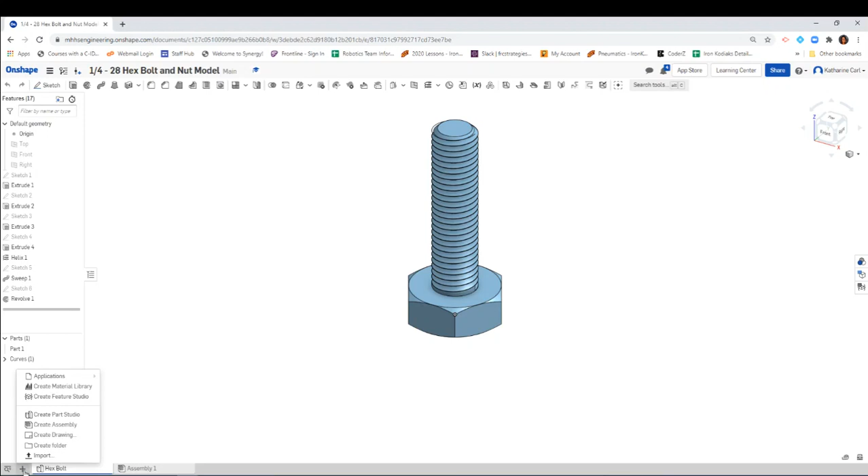If you notice, it renames a new and creates a new tab. I'm also going to right click and rename this tab the hex nut. That way we can really quickly tell which tab is for which part. I'm going to click in the open space to confirm.

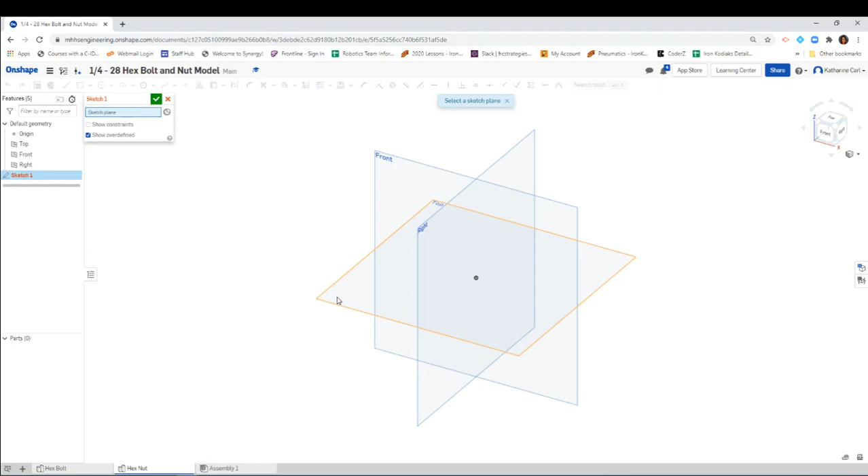All right, so we're going to model this very similar to how we did the hex bolt. I'm first going to create a sketch on this top plane. Again, a lot of dimensions are going to be similar. Why? Because they have to function together, right?

Similar to the other one, we're going to start with a polygon, and more specifically, we are going to create a hexagon with 6 sides. Click to make that stay since it's 6. If this is a different number, don't worry, just right click, hit escape, and then you can double click on that value and enter in the correct number of sides, okay? But so far we are good, so I'm going to hit enter.

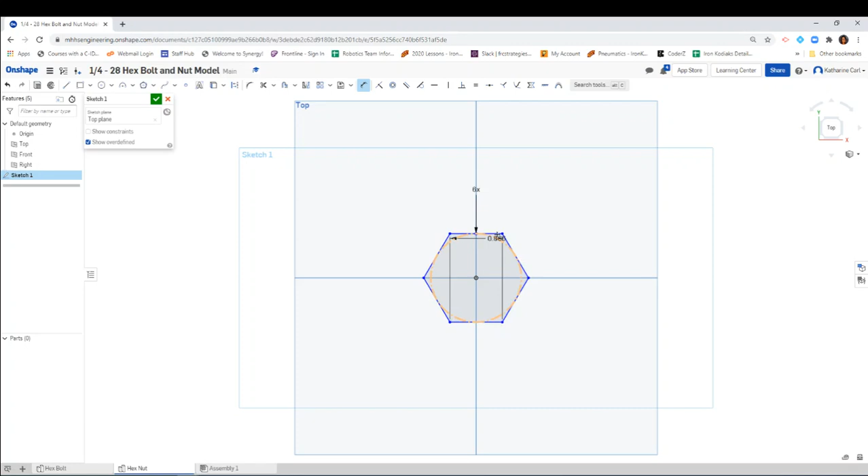The next step is we're going to measure and dimension across the flat. So click on one side, the next side of the hexagon, click to make it stay, and we want that to be 1/2 of an inch to match the hex bolt head, okay? Hit escape. I'm going to bring this a little bit closer so that we can kind of zoom in a little bit more.

All right, our next step though is we're actually going to draw a circle in the center, and that's going to represent kind of the hole in the middle of the nut, right? So I'm going to click on this circle, click on the origin, move it out, click to make it stay.

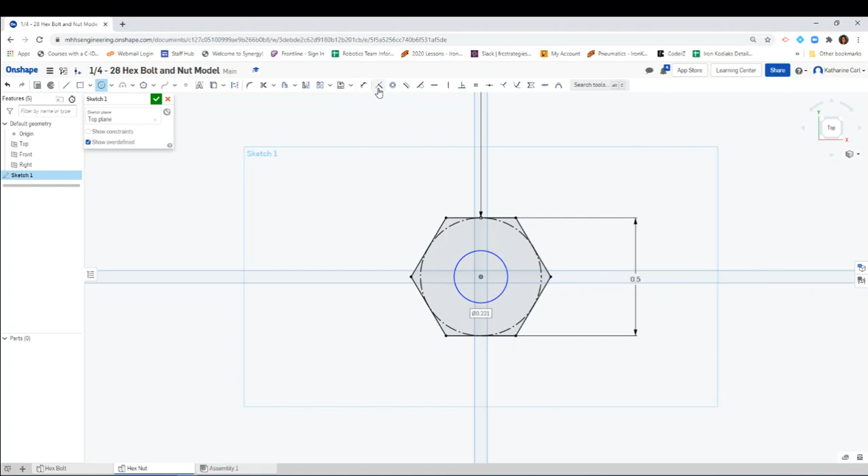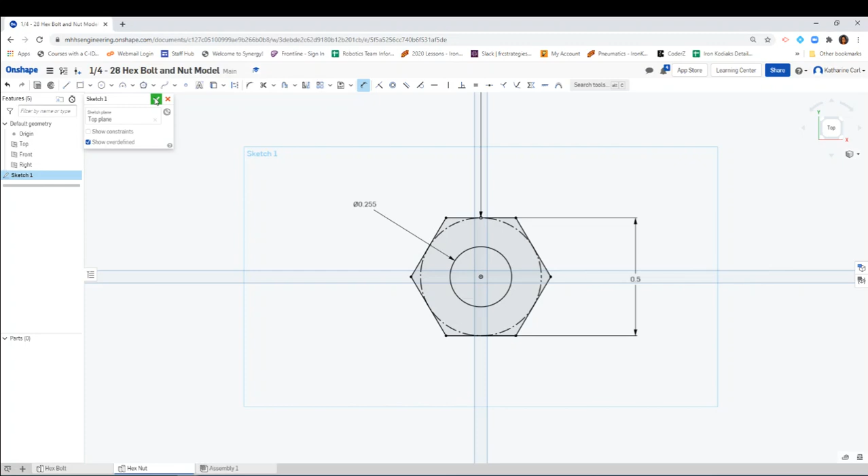I'm going to click on my dimension tool, click on that circle, and we are going to make it 1/4 of an inch, right, which is 0.25, but I'm going to add a really small value to make it a little bit bigger, and that's just due to tolerances with the 3D printer that I typically use. So I'm going to go ahead and click on enter, and there is our sketch that we need to start with. So click on the green check mark to confirm.

I'm going to switch to the isometric view and zoom in so that I can kind of check as I'm going to extrude it. So click on extrude.

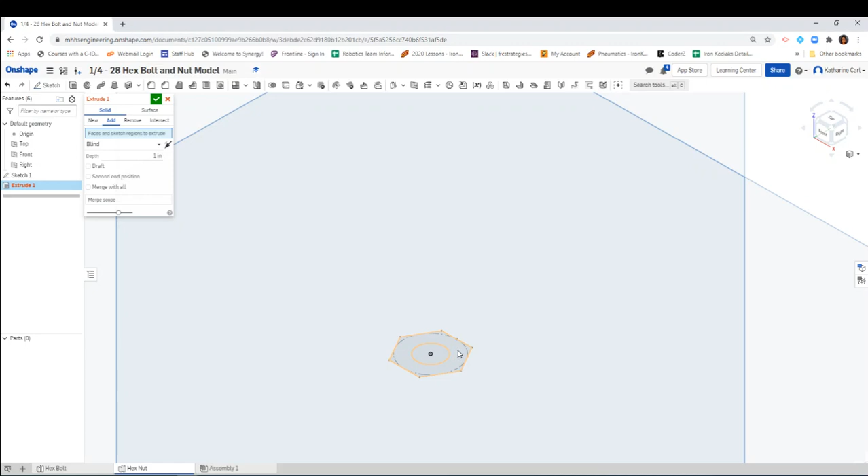We are adding a face, and the face that we're going to add is this outside ring. We're not going to add the inside, only the outside, right? Because we want the hole in the middle. So click it here, but we don't want 1 inch. Instead, we want the same dimension as the bolt head, which is 3/16ths. We'll click in the open space to confirm it.

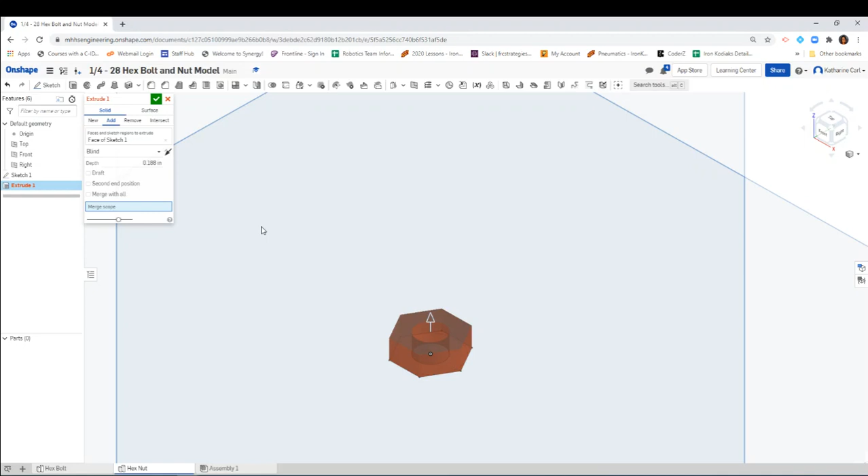When I click on add, it was having some challenges because I think there's a few things going on. So just make sure it's on new right now. And since it still is giving the correct preview of what we want to do, then you can go ahead and click on the green check and confirm it.

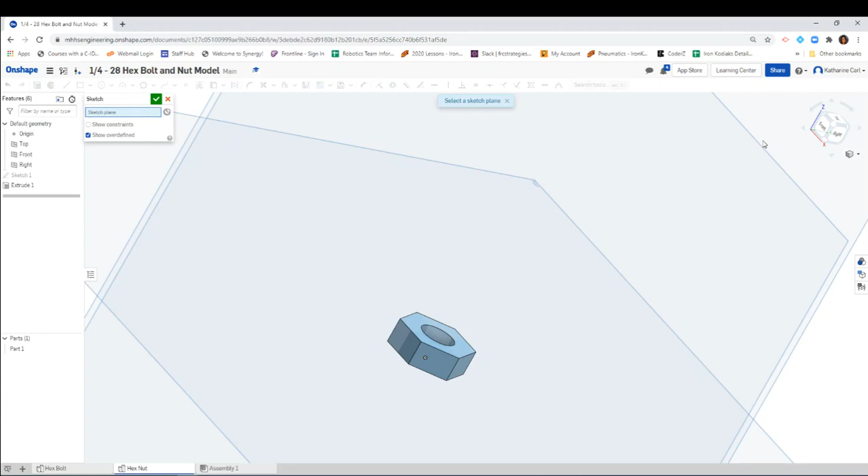There we go. Okay, so our next step is we want to add the professional kind of touch, which means we want to shave off these little corners. To do that, I'm going to create a sketch, we're going to do it on the bottom first. So this flat surface, I'm going to click on the bottom, zoom in so I can check it out a little bit better.

And remember, similar to how we did the hex head, we're going to add 2 circles. Our first circle starts at the origin. Oh, I don't think I did start at the origin because I think I moved.

Hit escape to exit out. I'm going to click on the circle tool again, make sure I'm at the origin, then click and go towards the flat edge to get that tangent symbol, making it an inscribed circle. Click to make it stay.

If you notice, that dimension right there should be 0.5, and it goes all the way across.

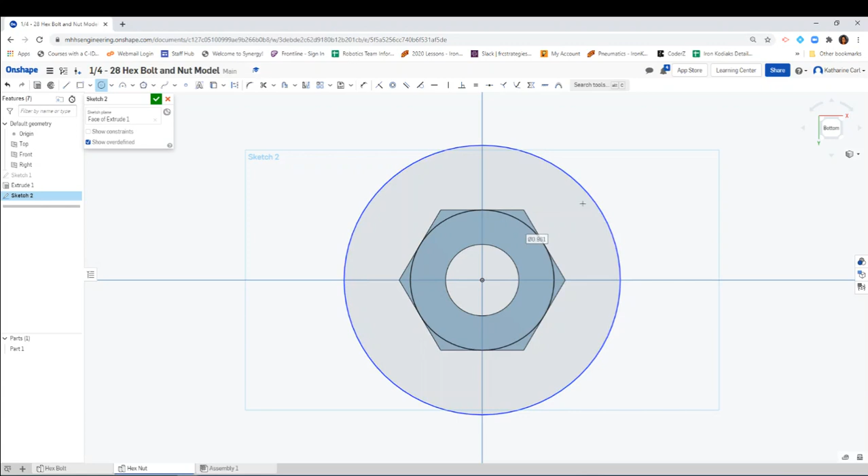Then I'm going to create another circle that's larger, and that was going to be 1 inch, just like it was on the hex bolt. I'm going to click on the green check to confirm.

I'm going to rotate it so we can see it clearly. Now we're going to use extrude, and we are going to remove this face and then these corners. I know it's going to look funny for a second, just like it did the hex head, because we have to add this draft in.

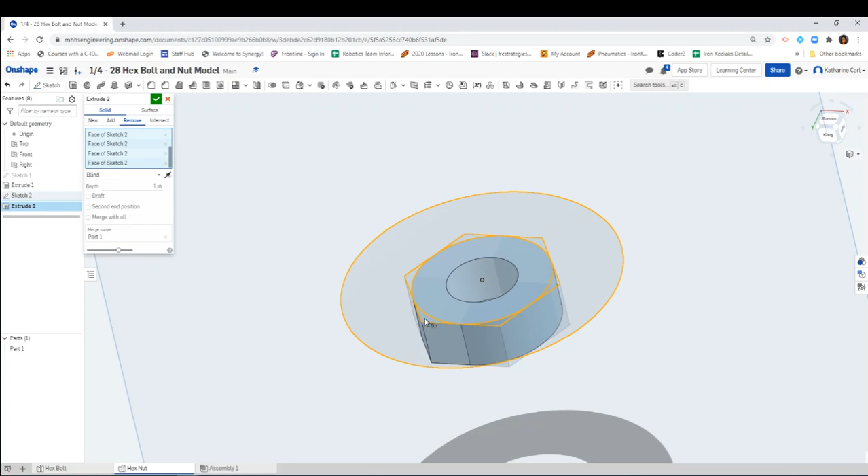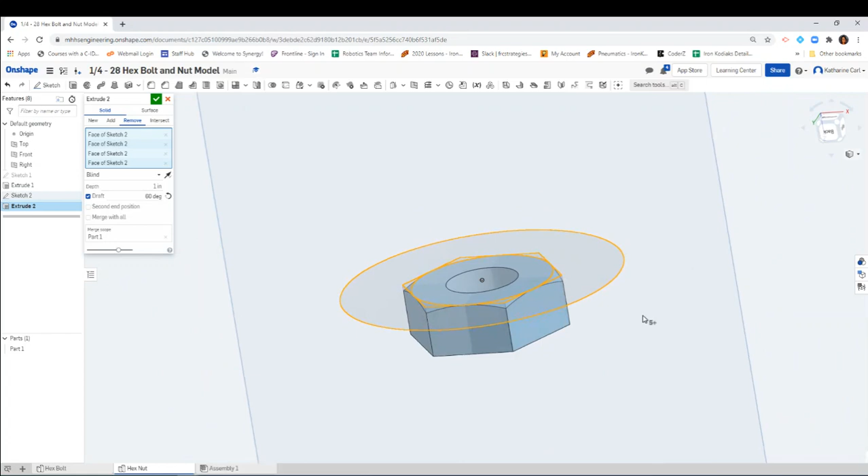So click on that draft. Remember, it goes inward, so you want to switch the direction. Click on that, and instead of 3 degrees, make sure it is at 60. After you type that in, you can click once in this open space to get the right preview so you can confirm you selected all the sides and it looks good. Green check, there we go.

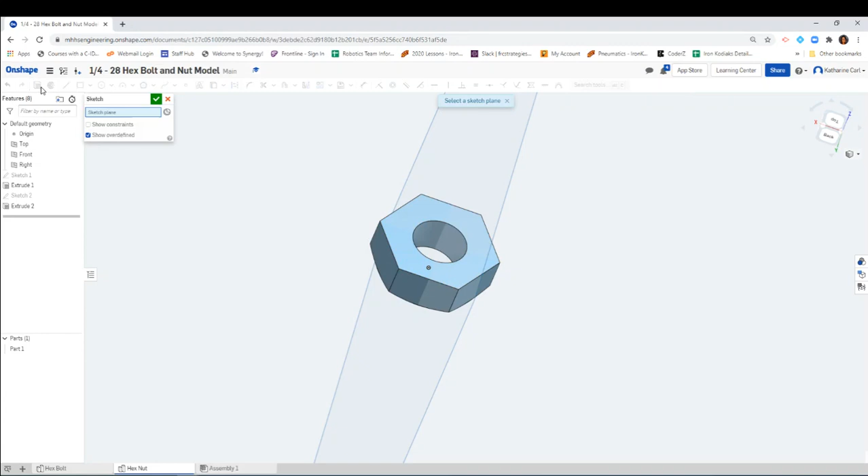Now we're going to do it on the other side. I just clicked on that view cube to rotate it and zoom in to see. This side has those corners cut, but this side and face does not, so I'm going to create a 2D sketch on this face.

I'm going to look at that top view straight on. Now we're going to add those two circles again. Click on the circle tool, click on the center, click on the edge to make sure that it is... and that's not lining up for a second, so I'm going to try this again one more time with the circle tool. There we go.

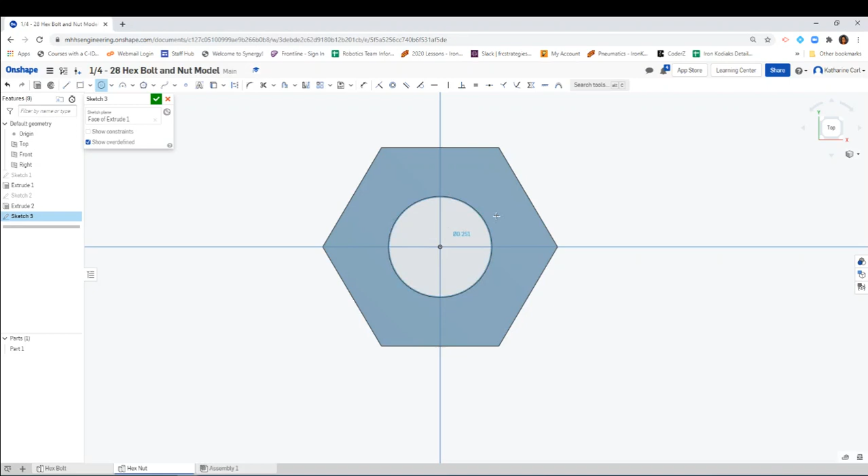Make sure it's in the center there, and now we'll see if we can go to the end. It looked like you just have to be careful of the symbols that you see, because every once in a while it won't line up, and you want to make sure that it does, sometimes not all the time. Click on the center again, because now we need to make our circle that's larger.

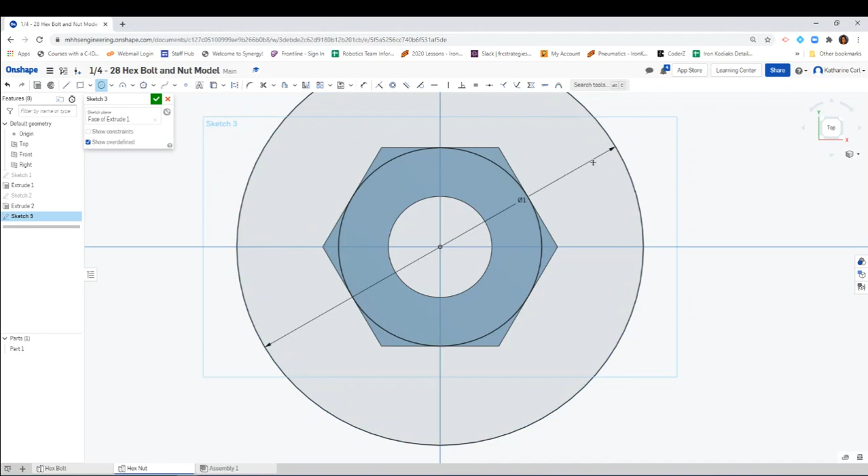Click to make it stay, and remember that dimension we want to be 1 inch, so type in 1 and hit enter. Go ahead and click on the green check. We're going to rotate it, there we go, and we're going to click on extrude.

We're going to click on these shapes, and I'm going to click on remove so you can check it out better. Click on that one, click on that one. Just be careful when you're clicking, because you can very easily click the wrong side.

And if you do, again, don't worry about it, you can always fix it. If you selected one that you didn't want to, go over here, I can close it. Oh, look, no, I actually really want that. So click on the shape again.

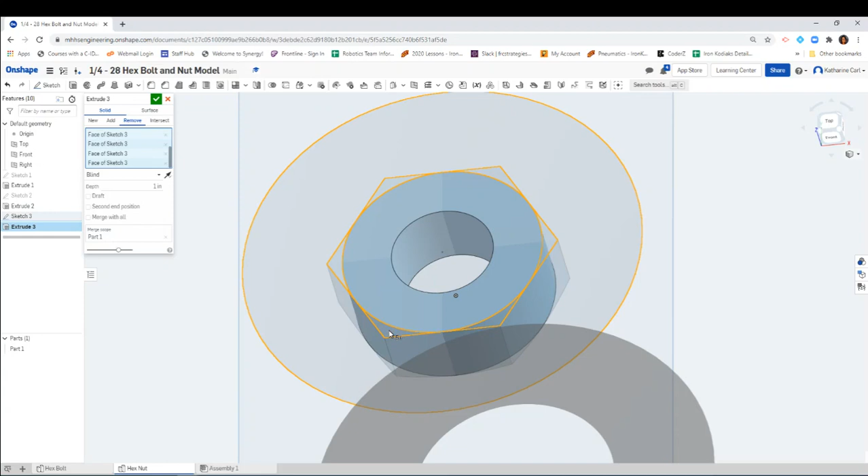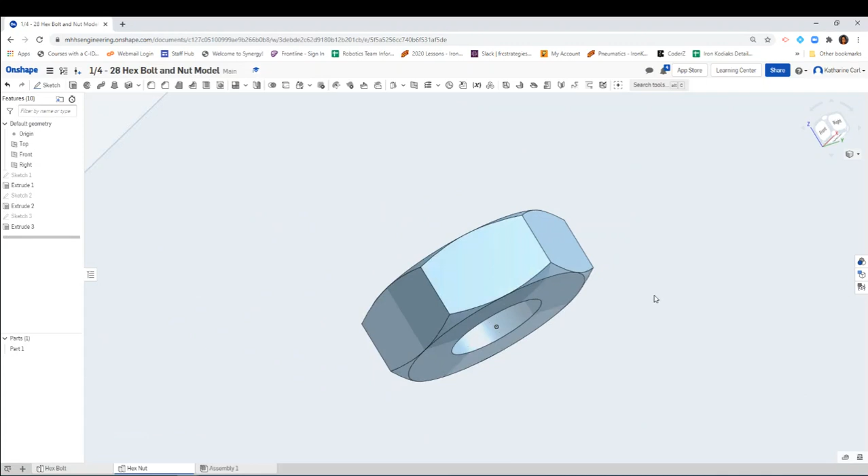All right, now remember, we need to add this draft in here, and we need to switch the direction. So click on that circle and then change that degree to 60. I'm going to click in this open space, and there you go, kind of cuts off the corners. Green check to confirm, and there is a great start to our hex nut.

All right, so our next step is now we need to add the threads in the middle, and again, it's going to be really similar to what we did before on the hex bolt.

Our first step is to create the helix, which is going to become the path of our sweep. Click on the helix, click on that cylinder, but be careful—we don't want the number of turns, because we want the pitch to match our bolt. So we're going to change this to pitch, and change it to our actual pitch, which is 1 divided by the number of threads, so 1 divided by 28. I'll click in this open space, and there are our threads, where they're going to be located. Click the green check to confirm, and there is our helix.

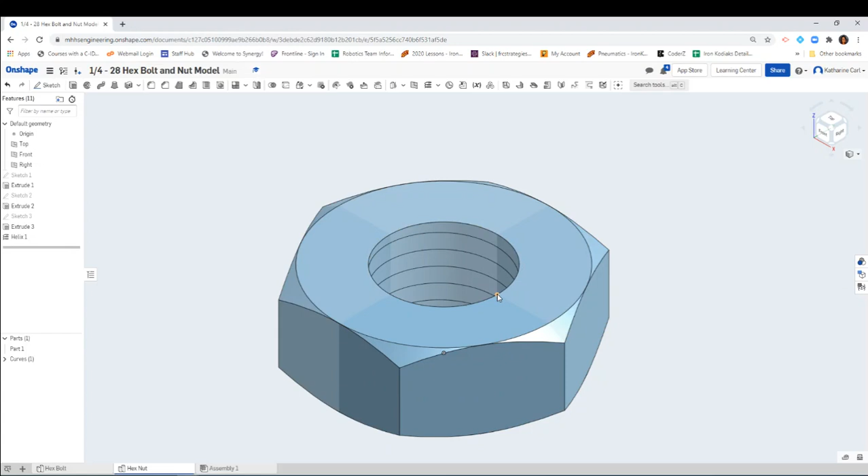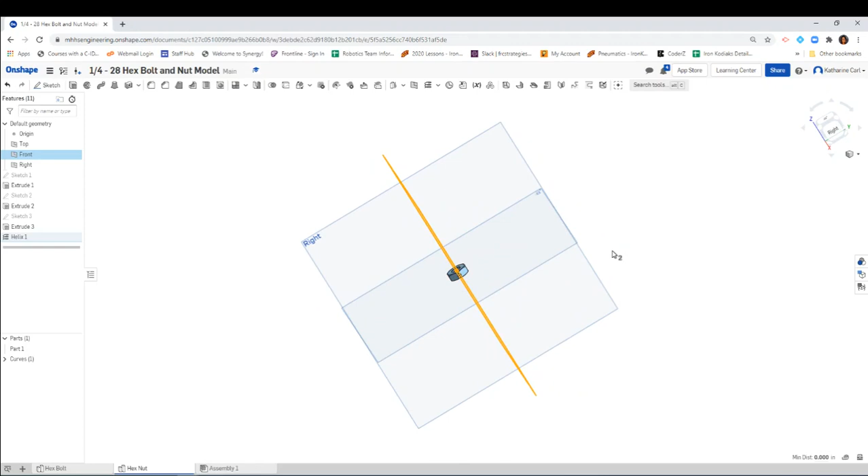Now here's the start point of that helix, right here. I'm going to click on it so I can visually see it as I zoom out. I want to double check—yep, looks like it's sitting right on that front plane. If I click on that too and rotate it, yep, directly in line. Click in the open space to have that go away.

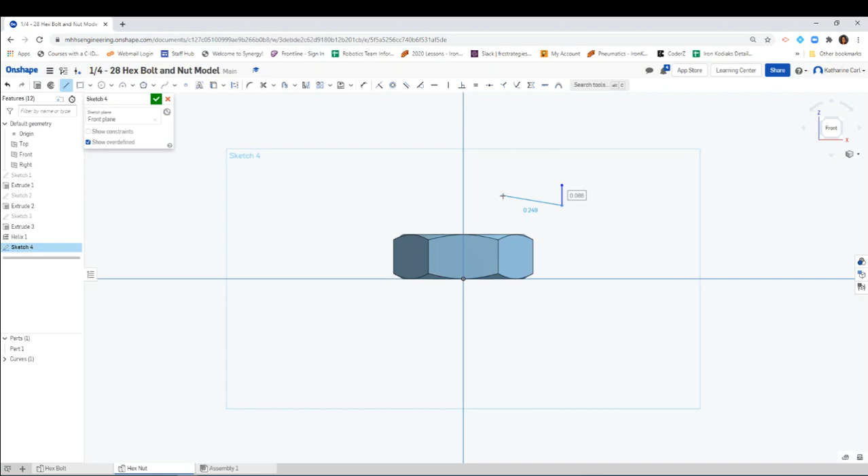That means I'm going to create a sketch on this front plane. Click on the front plane to look at it, and I'll draw the triangle that we need to cut out. But this time our triangle is going to face the opposite way. Previously we drew a triangle like this, and it went inward—we don't want to go inward here, because if we drew that inward, it would just cut into the already cut hole that's there. We don't want to do that.

So instead, we want to draw a triangle out this way. And again, we need to make it an equilateral triangle. Click on that equal sign, click on one side, click on the next side, click on that same side, and click on the third side. Now all sides are equal.

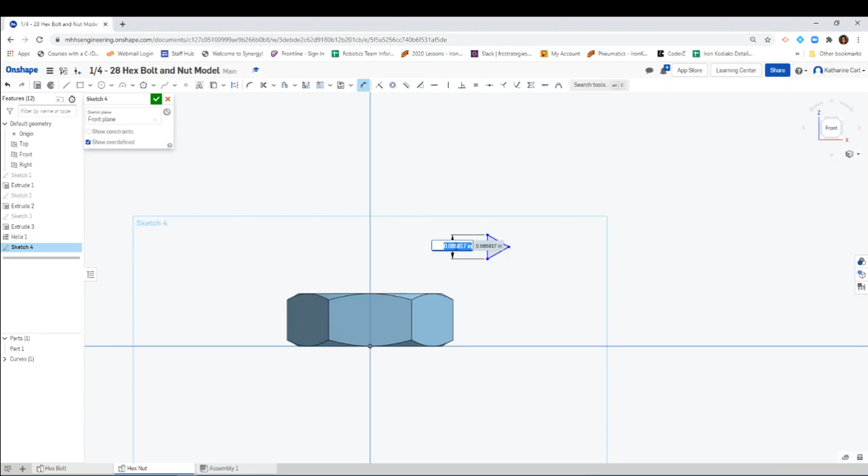Now the next step is we need to determine the length of this. Remember, typically that's going to be the thread, or the pitch, which is 1 divided by 28. But as we mentioned before, there is a little error that tends to occur, so we're going to make it a little bit smaller still—it's going to be 0.035.

Now our next step is we want to align, so I'm going to rotate this and use the pierce tool so that it lines up on our helix. Click on the pierce tool, click on this bottom point again, and now click on the helix, and it should line right up. Awesome.

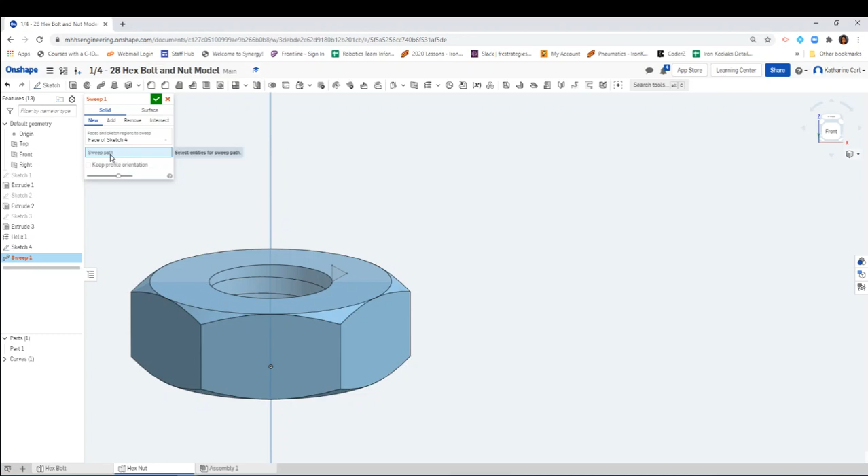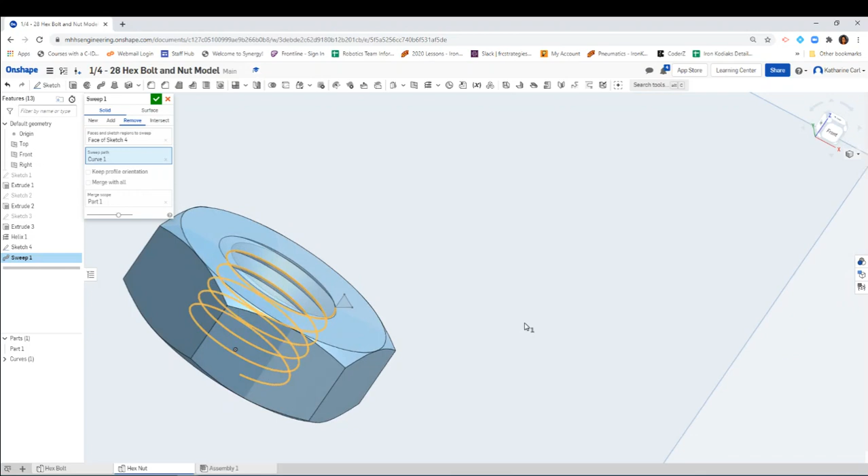All right, now our next step: click on the green check, and we can try our sweep tool. We'll first click the region, which is this right here. Now we need to select the sweep path, so click on that red box and I can click on my helix. Notice right now it's adding—we don't want to add it, we want to remove. If I do that, you can check it out, we get a bit of a preview. It looks pretty good—you can see it better at that angle. Click the green check so we can double check it.

And there is our nut. Now I'm just going to zoom out, and I'll go ahead and turn these planes off. That way, when I click on the isometric view—bam—there is your hex nut.